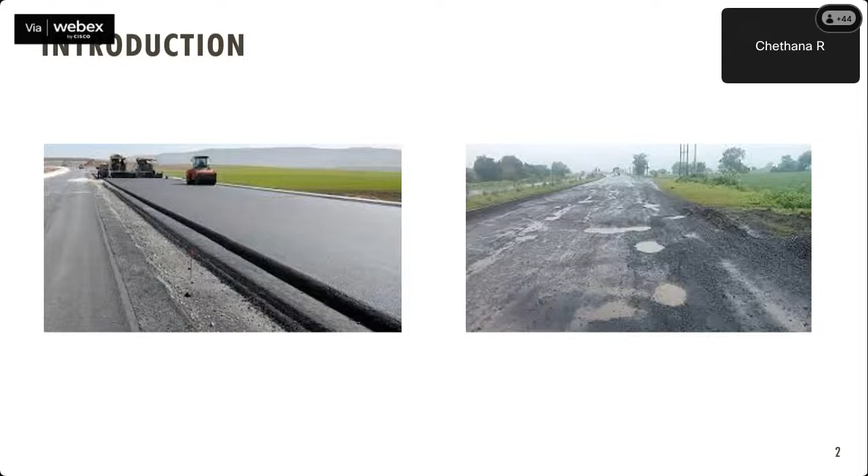And over years, what we can see on the right side is how the pavement undergoes failure, different kinds of distresses that it undergoes, maybe after a period of 10 years, 15 years, or even less based on what the climatic condition and the traffic is. So coming to that, I am showing two scenarios. In India, we have heterogeneous traffic conditions. Most of the highways are loaded mostly by trucks: 2-axle, 3-axle, multi-axle trucks. Some of the highways might not be loaded. So that is a criterion that we need to consider as well.

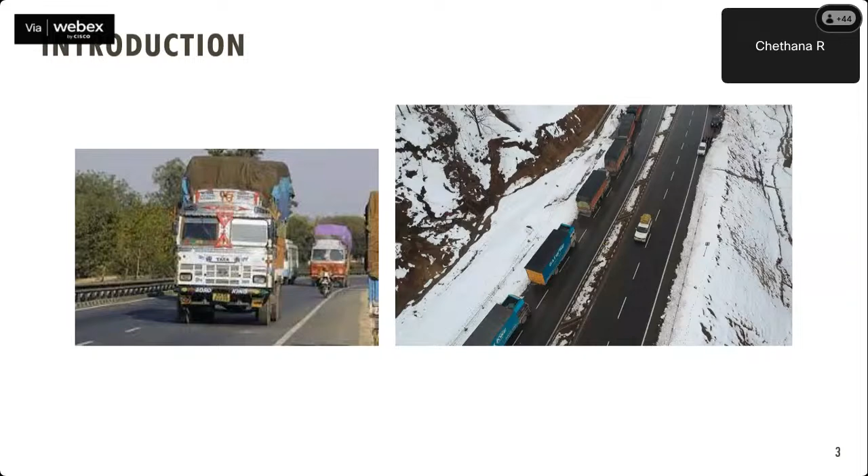Right. So when we say serviceability, since the pavement is an infrastructure, it is expected to behave in a certain manner or be serviceable to the users who are using the pavement. Right. So right from the excellent condition to the failed condition, where I showed in the second slide, we saw a failed condition could be the last part of the pavement or the end of the pavement where it undergoes a rehabilitation.

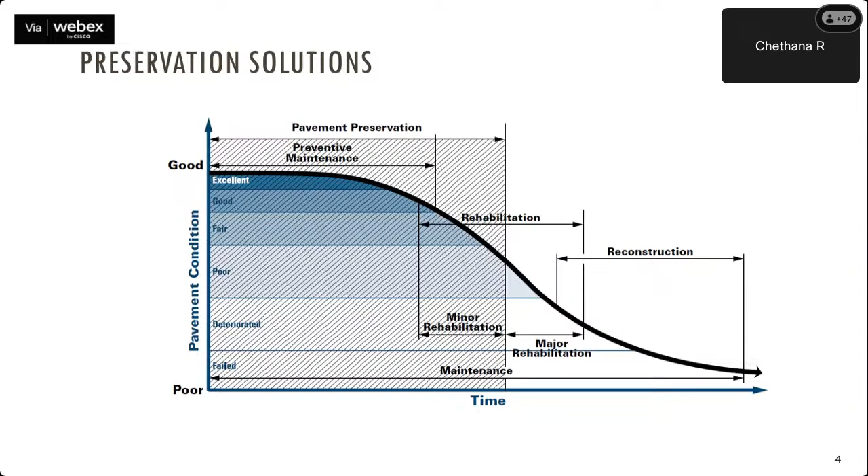So the focus for the highway agencies these days is mainly to maintain the existing pavements rather than constructing the new ones, right? So we have a long length of highways across the country, the national highways, the state highways, etc. So the focus is on how to maintain them as well, apart from constructing or connecting different parts of the country. So we have different types of projects.

Currently, the scenario in India is where the maintenance is schedule based. So now what do I mean by schedule based? So if you take the urban scenario or even the national highways, there is an overlay provided to the pavement. Overlay, when I say bituminous concrete or any other type like stone mastic asphalt, etc. So for the second year, fourth, sixth, eighth, etc., whether the pavement has deteriorated or not deteriorated, the maintenance strategies are carried out. So is that feasible economically?

I would like to differ there, because we say that once the pavement has deteriorated or we know that it's on the verge of deterioration, then it would be wiser to carry out a maintenance strategy. So that is what we call the performance based versus the schedule based. So currently what we follow in the country is schedule based.

So next, coming to the life cycle cost analysis, all that we consider during the initial construction of the pavement is only the design cost or the material cost, etc. So none of the agencies bother about the cost that incurs because of the maintenance that has to be carried out over a period of years, or if we consider a flexible pavement, 15 years. Neither does it talk about the benefits that are going to accrue to the agency, nor the benefits to the road user. So all these need to be considered when a new pavement has to be started for construction.

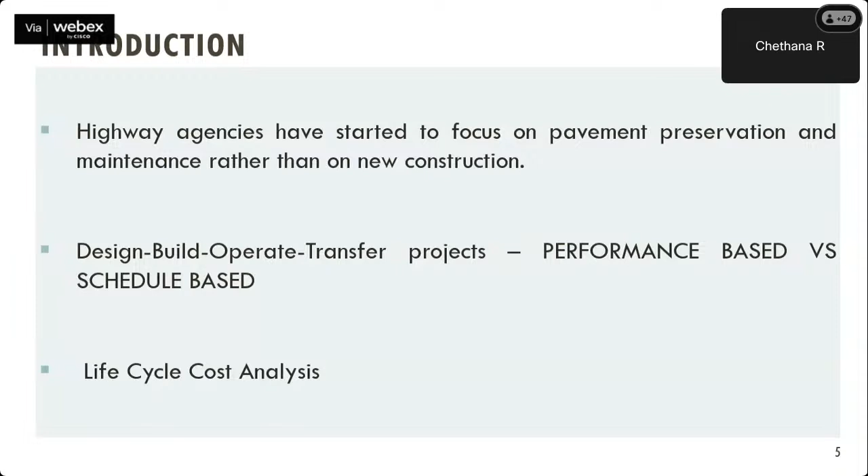So with that, in the slides to come, I'll be emphasizing more on a term called system. So what do we have as this system? We are talking about the pavement management system, which is a set of tools or methods that aids the decision maker. When I say the decision maker here, we are talking about the agencies which take up the construction, in finding ideal maintenance strategies for providing and maintaining pavements at or above the desired serviceability. So as per AASHTO, there is a certain criteria of serviceability supposed to be maintained or met when a pavement is constructed, over a span of time which in our terms we call the design life, right?

So with that, we came up with the PhD research topic, where we thought about the different criteria that are going to be affecting the pavement. So we will develop a framework where each of the agencies who take up flexible pavement construction projects should go through a certain procedure or methodology which they should follow during the course of time, from construction up till rehabilitation, and how they can improve the performance of the pavement accordingly. So we'll be talking about structural performance and functional performance. We'll deal with it a little in detail in the slides to come.

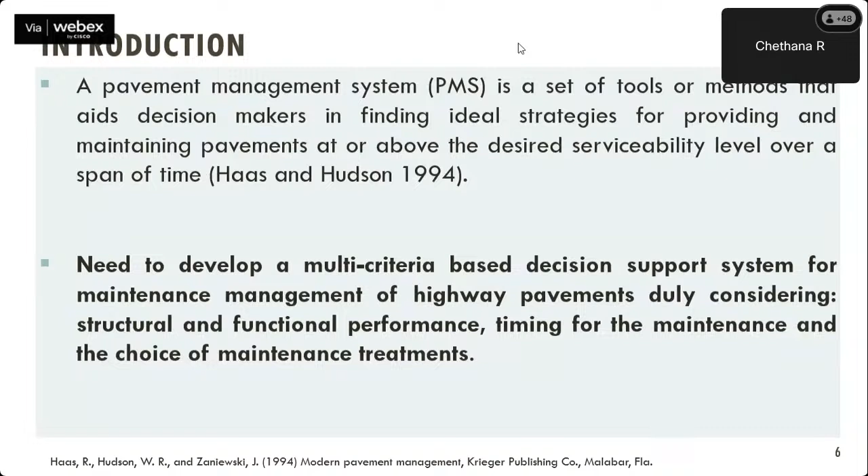So the research question here is where we are developing a multi-criteria based decision support system for the maintenance of the bituminous highway pavements. So that's what we are talking about. So we have certain research objectives which were fulfilled as a part of this work.

So first is we'll talk about the performance prediction models. So we said we have to know what is the performance. Performance, how do we measure them? Maybe in terms of the rutting that's going to occur, in terms of the cracking that's going to occur, in terms of deflection measured either through Benkelman beam deflection meter, which is kind of getting outdated. So we use the falling weight deflectometer. So we measure the distress parameters and try to project it or predict it for the entire design life. So that's the first part of it.

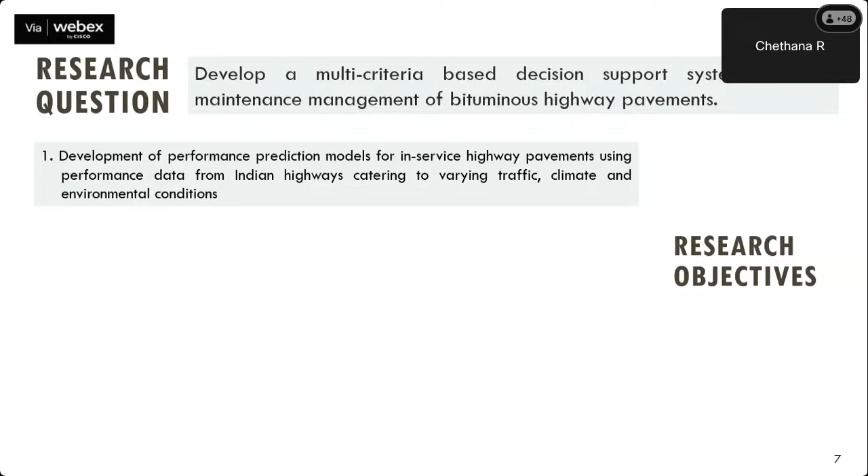Next, we develop a framework to decide the timing. So I mentioned that we have different kinds of maintenance strategies. So what is the right time where we are going to maintain with different traffic levels? Of course, we talked about traffic levels because it's not uniform throughout the country. So we are talking about different traffic levels as well.

And next is to consider at what point should I maintain. So I talked about the performance based versus the schedule based. So we'll talk about two terms called the trigger level and the threshold levels, where we are talking about what is it that is going to trigger the maintenance. How do I decide when I'll perform the maintenance?

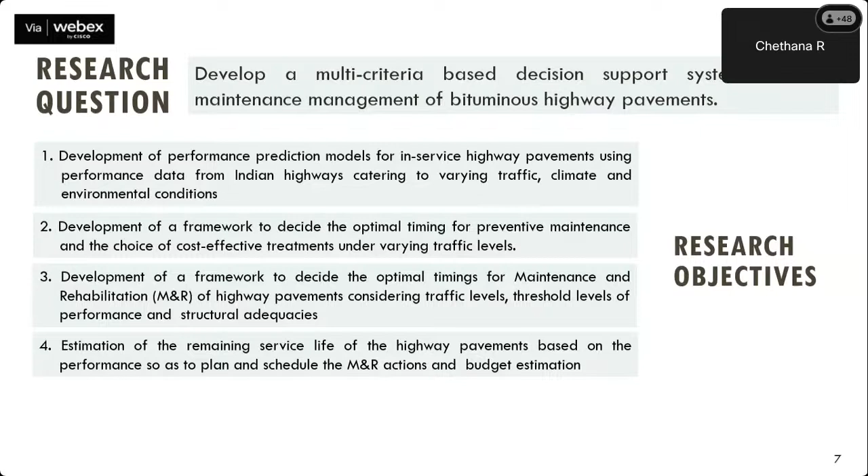Next is, once I do a maintenance strategy, how can I quantify the effect on the service life? Is the design life going to extend? The design life is for 15 years. Can I extend it when I do this kind of a maintenance strategy? We'll also be talking about the economic aspect as well. So last is I'm going to give a framework considering all of the above parameters. So this is the methodology. The flowchart depicts the methodology.

So when we talk about pavement management, we have two levels. So one is the network level where I'm considering the whole state. Maybe like I consider the whole state of Kerala. I can decide what is it going to be into Trivandrum, Cochin to Alappuzha, etc. So I can consider all the roads.

On the contrary, where I am talking about the project level, I'm only talking about one stretch of road. So one stretch of road connecting point A and point B. So I'm going to deal in depth about the different kinds of maintenance strategies or the materials design, etc. only for that particular road. So what we are working here is only at the project level.

So next, we go to the performance prediction models, which I just spoke about, where we determine the different kinds of distresses. So from the performance prediction models, I have different sub topics here, where we are talking about the structural and functional aspect. As we understand, when I say structural, it is the entire layer or different layers of the pavement which is actually considered. Functional refers to only the top layer of the pavement, which is involved in maybe the safe movement or the comfortable movement of the road user.

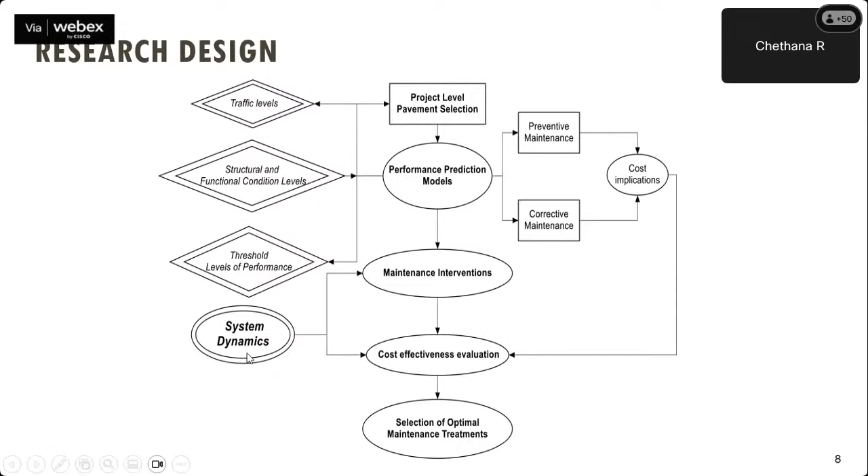So how am I going to model the whole thing into a single system? So I said system is something which we'll be using very frequently. So pavement is not a single material, or it is not a single component. There are multiple components which are involved in the proper functioning of the pavement. So that's where we have modeled all of the parameters which we felt were influencing the performance of the pavement using system dynamics. So we will talk about the first objective. So first one is where we decided to have some performance prediction models.

So there are 4 kinds of models that we looked at. Some of them were actually taken from the data that we actually used for modeling, which was one of the measured deflection areas in the state of Karnataka. So we have taken the actual data and we have done the modeling part.

So first we are talking about the deflection prediction model, where we estimate the deflection in millimeter based on the initial level of deflection. So initial level of deflection is when the pavement is constructed, it would be at a particular deflection. So based on that, how is the deflection going to be over a period of time? So that's the deflection prediction model.

Next, we have the rutting prediction model. Rutting, as we know, is the depression, or let's say some deformation in the wheel path of the highway. So we are determining what the rutting is going to be. The cracking in terms of percentage. So from the area of cracking we'll be able to determine the percentage of cracking. And the last is the roughness prediction model, which is measured in terms of IRI in meter per kilometer.

So in the current scenario for our Indian condition, we have rutting and cracking. These are the 2 main parameters which we will be using as part of our IRC 37 2018, where we consider some amount of rutting, like let's say 20 mm, and 20% of cracking as the threshold up till which the pavement can be serviceable. Right? But we do not consider other parameters like roughness, deflection, or even patching, potholes, we do not consider all of that.

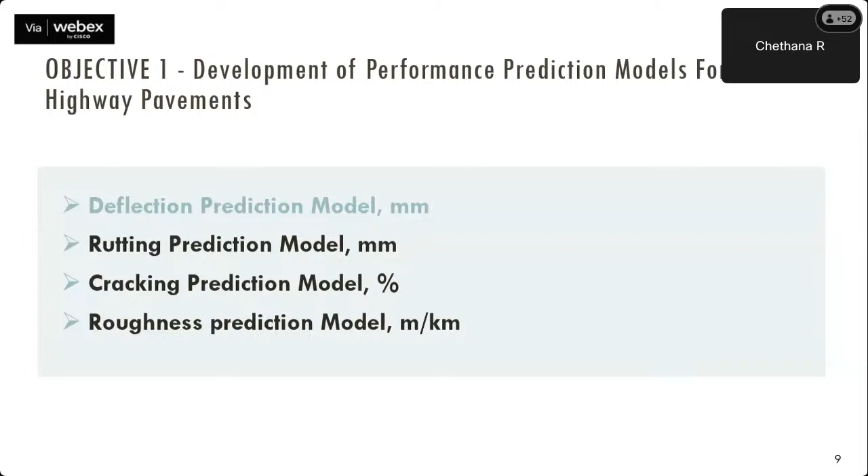What we realized is that the rutting, cracking, and roughness is a function of deflection. When I say function, it is directly dependent on the deflection of the pavement. So with that, we realized that the parameter deflection is the main parameter which needs to be considered irrespective of what kind of distress we are looking at. Since rutting, cracking, roughness, or even patching, raveling, whatever distress we would want to measure is dependent on deflection, it becomes the main criteria for our work.

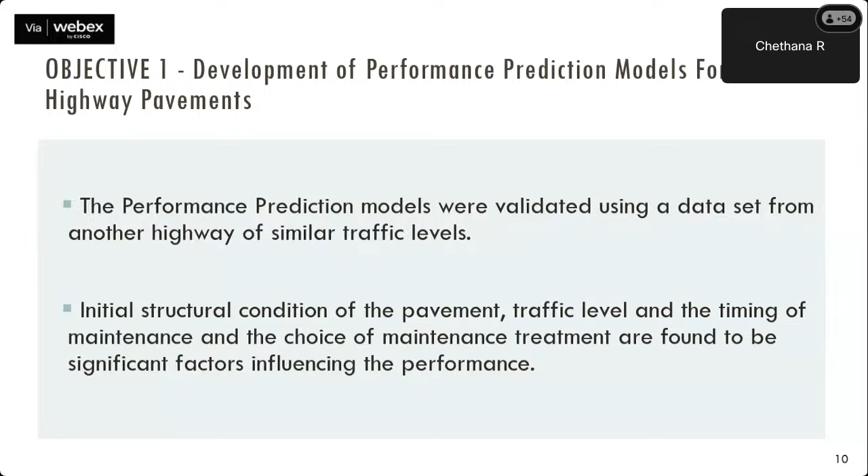So once we determine the performance prediction models, this model could either be a linear or non-linear model based on the different data that we have collected and the parameters that we consider. This was validated using another highway's data, which looks like a similar highway. And then the initial structural condition of the pavement, traffic level, and the timing of maintenance were found to be the significant factors influencing the performance. Most of the performance prediction was dependent on these 3 variables. Hence, they play a major role in deciding what treatment strategies we are going to adopt later in the work.

So 4 levels of traffic have been chosen, considering that 75 is a low volume of traffic and 150 is a high volume of traffic. We have also considered a design period of 15 years for our pavement to predict the performance. The procedure for prediction after we develop the distress models is very similar to what we have in the IRC code.

After that, we are talking about structural adequacy with the initial deflection levels. I mentioned that the structural adequacy, or the initial deflection level of the pavement, was a major influencing parameter for performance. Hence, we have kept that as the criteria to decide the framework. So 0.25 mm, 0.35 and 0.45 mm are the values for which we predict the future performance of the pavement. How have I come up with these values 0.25, 0.35, 0.45? This is not something which we randomly chose.

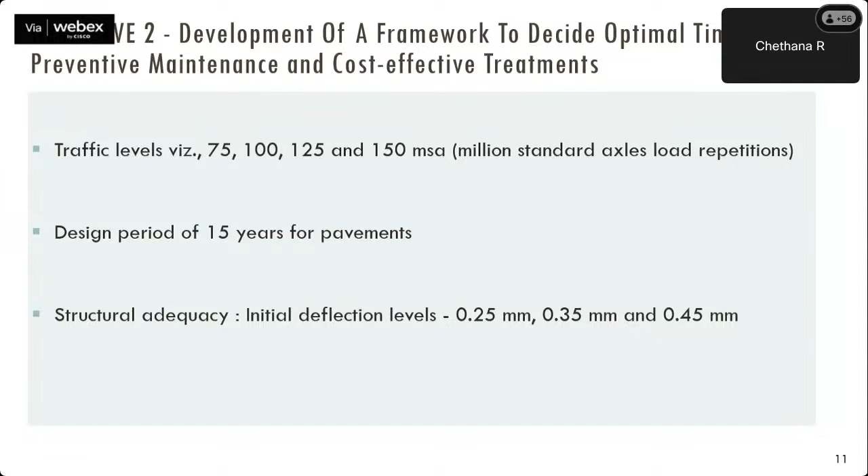A questionnaire was circulated to most of the professionals in the country, the practitioners in the field of pavement engineering. We had a set of questions where we asked them what level of deflection is acceptable. So these values we got from the answers to the questionnaires, where we have decided these parameters. So next we'll be talking about the choice.

So we said we now have different traffic levels, then we have different initial deflection levels. Next is where we have the choice of the treatments. We mentioned that the choice of the treatments could be varied. With the research going on in materials, there is a provision to adopt a wide variety of materials. Even if I just take a simple bituminous mix, for example bituminous concrete, I have different nominal maximum aggregate sizes which I could be using for the surface layer. Again, the bitumen that I'm using could be very different.

So now I'm choosing the routine maintenance. What do I mean by routine maintenance? Routine maintenance is something which is carried out on a general basis, irrespective of the performance of the pavement. That could be as simple as removing loose particles from the road, patching the potholes, or sealing the cracks. Minor repairs like that come under routine maintenance. They do not form a major chunk of the whole cost of the pavement.

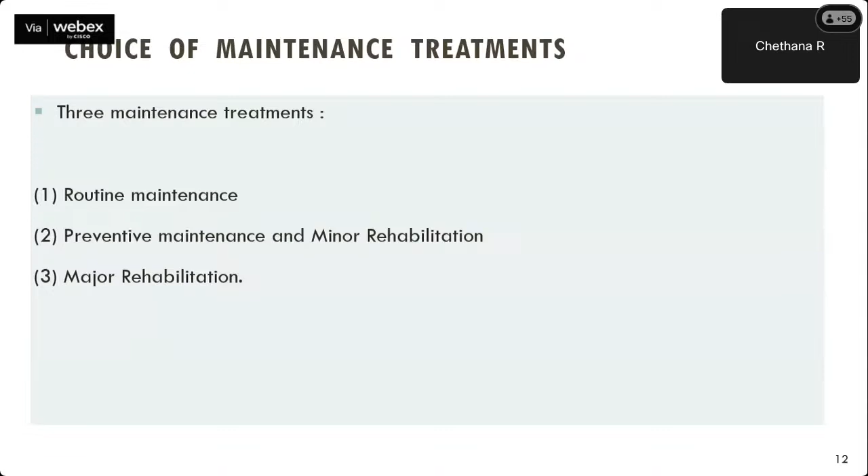Next is the preventive maintenance or the minor rehabilitation. Preventive maintenance is even before the pavement fails, when it is structurally sound, that is, the deflection is very less. So even before it starts to deteriorate, I'm going to provide a certain kind of preventive maintenance. As for minor rehabilitation, I'm talking about bituminous courses of maybe 30, 40 or 50 mm thickness. Major rehabilitation is where we talk about thicker strategies, like bituminous concrete and dense bituminous macadam, or bituminous concrete up to 75 mm thickness, maybe in 2 layers, etc.

First we'll see the preventive maintenance, where we have varied options. We could have a fog seal, slurry seal, micro surfacing, surface dressing. In surface dressing, we have the single coat or the 2-coat; based on material availability or the kind of functional deterioration, we can choose the preventive maintenance. What we need to remember is preventive maintenance is only applicable when the pavement is structurally sound. We can't go for preventive maintenance when the pavement has started to deteriorate.

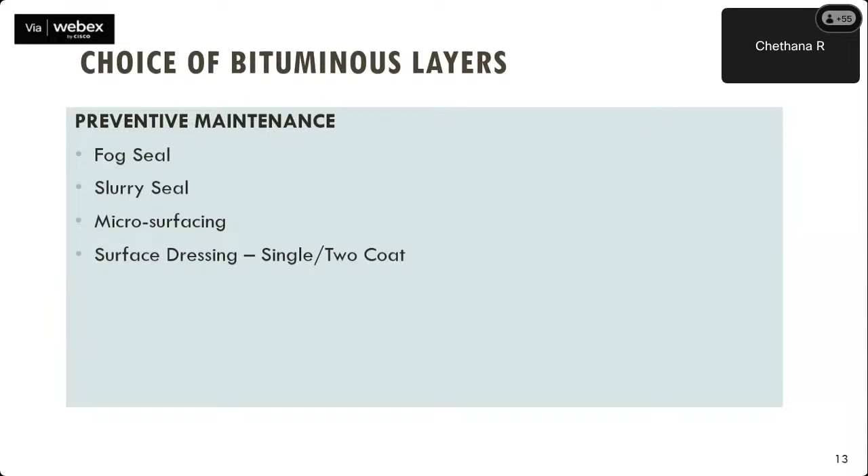I was also mentioning the choice of bituminous layers. Bituminous macadam is not generally used in recent years, but we have dense bituminous macadam, SDBC, BC. Even when I choose grade 1 or grade 2 BC, or grade 1 or grade 2 DBM, I'm not sure which kind of binder I could be using. If I choose the binder, should I use a modifier? Should I use an elastomer? Should I use a plastomer? Crumb rubber modified bitumen is being explored. And in the recent past, we even have plastic and shredded glass, which could be used in the binder. So we have a wide variety of options.

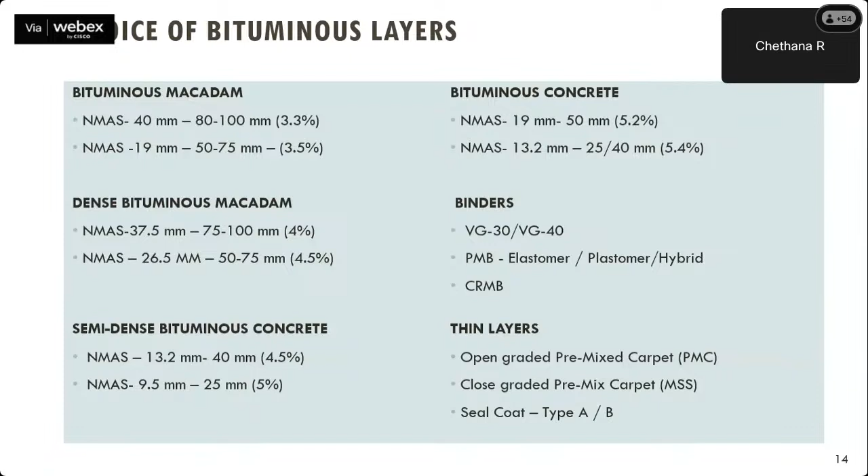And for thin layers, we have the pre-mix carpet, the mix seal surfacing, or the seal coats. So I have a wide range of materials or mixes that I could be using. Apart from that, for major rehabilitation I also have different materials. For the bituminous mixture, am I going to use something recycled, or the warm mixes which are gaining importance very recently? So we have the warm mixes or the recycled RAP. If we do recycling, the decision lies whether we do it in situ, in the field, or do plant recycling and go back to the field. So a wide variety of options are available.

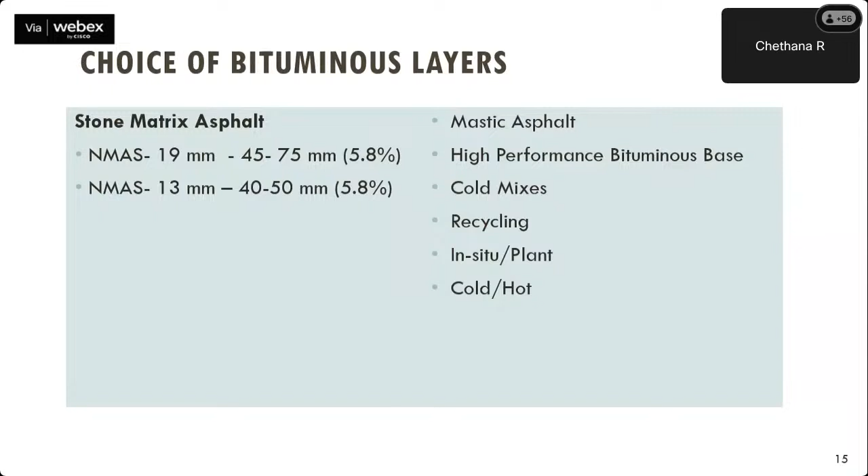So we need to explore, based on availability or the economic aspect, what is going to fit the project that is taken up. All of it is not possible, or maybe one of it might be wrong. So we need to explore what would be the feasible solution. Here we are talking about a new term called the trigger point, where, let's say, this is the performance of the pavement.

So we see a deteriorating pavement here where the condition is deteriorating over the period of age. So if I provide a treatment one, let's say bituminous concrete, then this is how the pavement would perform. On the contrary, let's say if I use stone mastic asphalt, there might be a higher increase. So where it's required for me to provide 2 layers of bituminous concrete, all I need to provide is 1 layer of stone mastic asphalt, which is going to be effective compared to 2 times provision of the bituminous concrete.

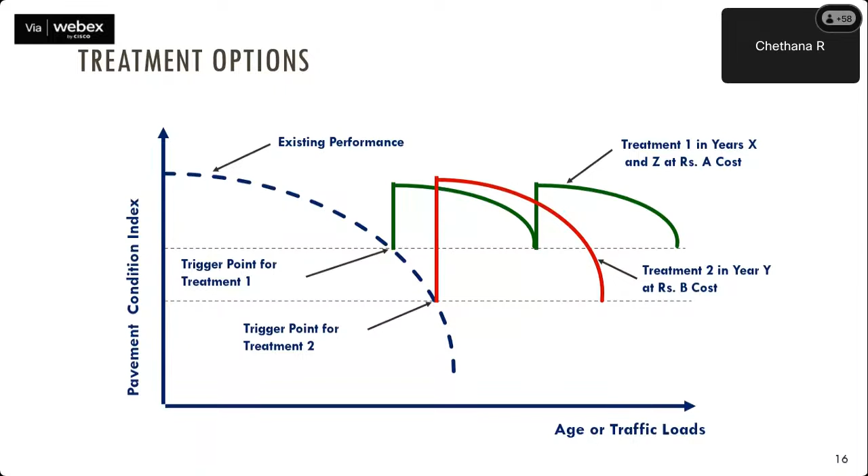So when we say 2 times provision of bituminous concrete, the cost is also going to vary. So here the cost is only once and the performance is also higher when compared to the bituminous concrete. So the choice of the treatment is something that we need to be very sure of.

So next we were talking about the pavement as a system. So we talked about the traffic, initial levels, or the material itself, right? So how do we actually consider this as a system and how do we model it is something which we have done using the system dynamics tool called Powersim. So this tool helps us model the whole behavior of the pavement or the different components or the influencing factors of the pavement modules into a single system.

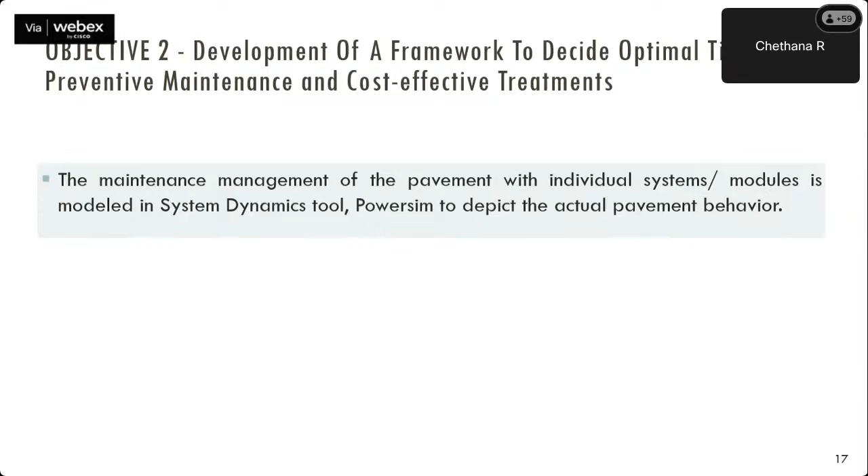And then we also have a traffic module. So all of these modules, the cost, the distress modules, etc., are dependent on the traffic module, because there is no deterioration of the pavement without the traffic. So that is something which we need to rightly project.

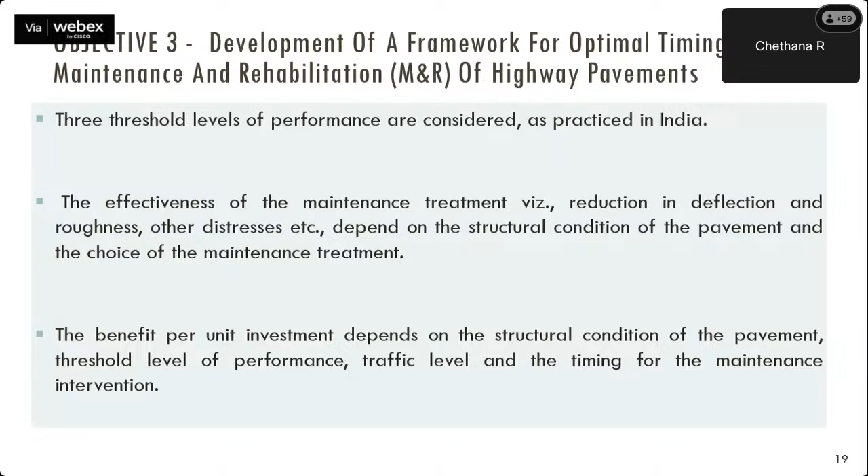Again, I'm not considering every distress separately, because we need to look at many distresses put together and not at a single distress, right? And what is the benefit that's going to occur when we adopt the threshold level differently? So if I do a maintenance at 2.5 meters per kilometer roughness, and if I do a maintenance at 3.5 meters per kilometer, what is the benefit that is going to accrue to the agency? We'll be talking about the benefit area in a while. But before that, we have adopted 3 threshold levels for roughness and deflection, roughness depicting the functional parameter and deflection depicting the structural parameter.

Again, why only deflection? Why not rutting or cracking? Because I already mentioned that rutting and cracking is a function of deflection. So though I project it separately, as different parameters, it is again correlated to deflection. Hence, we have taken deflection as one parameter.

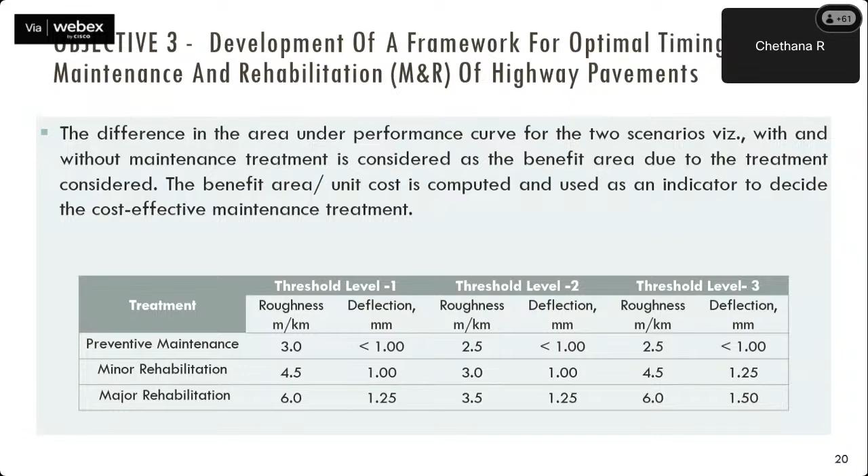For a minor rehabilitation, as soon as the deflection reaches 1 mm, I am going to perform a minor rehabilitation. Minor rehabilitation is when I have a bituminous concrete or DBM, etc., which is less than 50 mm in thickness. Major rehabilitation is when the pavement becomes very rough, around 6 meter per kilometer, or the deflection is 1.25 mm; then I'm going to perform a major rehabilitation. Likewise, I have defined different values of threshold 1, threshold 2, and 3.

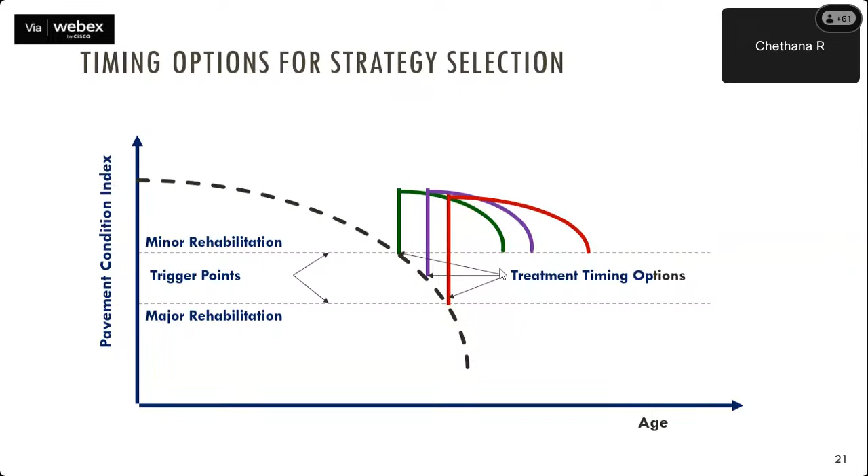So what is the benefit area that we are talking about? We have the minor rehabilitation; the point at which it triggers maintenance is the trigger point, and the level beyond which it should not be increasing is what we have defined as the threshold level. So we have the minor rehabilitation, the threshold level, and the major rehabilitation, a typical performance.

So what do we understand now by the benefit? This is the first deterioration of the pavement. This is the threshold level beyond which it should not be moving down. So I give a maintenance strategy, and then the performance increases. Again, after the material starts to degrade, it's going to deform again, and there is going to be a deterioration in the pavement, right? So the area below this performance curve is what we call the benefit or the benefit area. So this is for one kind of strategy.

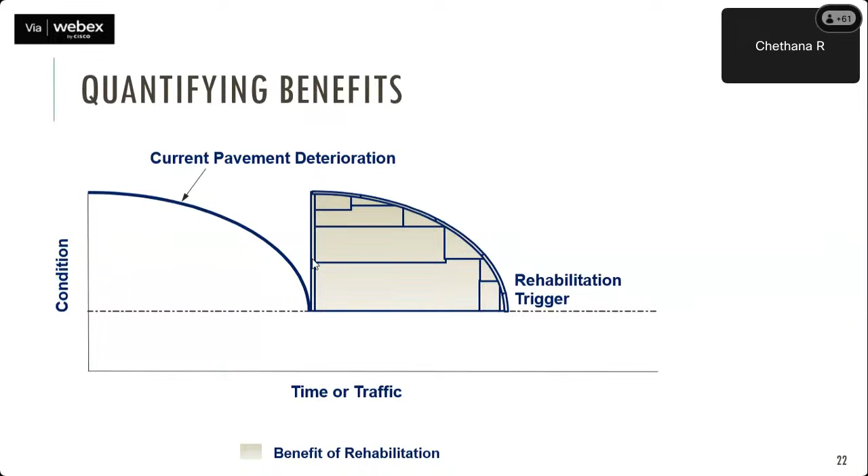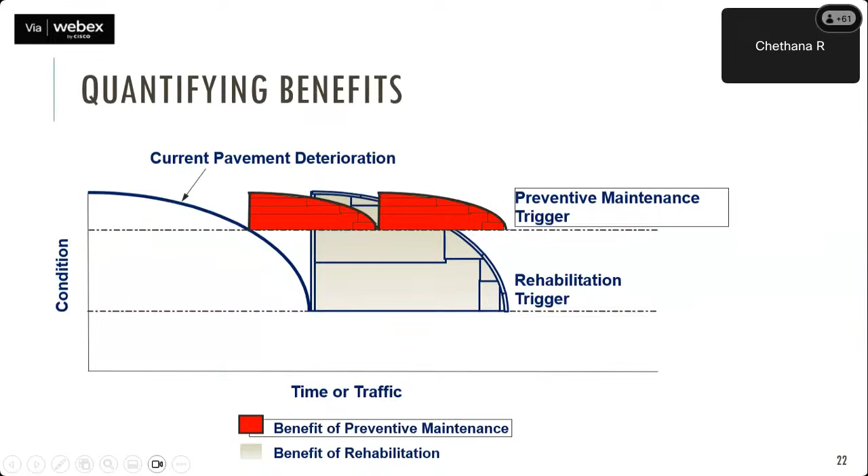Now if I consider a preventive maintenance, I said preventive maintenance is when the pavement is structurally sound. So even before it starts deteriorating, I'm going to provide a treatment. The area under this preventive maintenance or rehabilitation is what we define as the benefit. This is for the entire condition of the pavement. What we have here is given for roughness.

Again, I've just shown typical graphs here where the roughness is continuously increasing for the design life of the pavement. But at a particular year, or when the threshold is reached, if I provide a maintenance strategy, the value of roughness comes down, increases, comes down, and again increases. So the benefit area is the area between the curve with no maintenance strategy carried out and the curve where we have a strategy carried out. The area in between these two performance curves is what we call the benefit area.

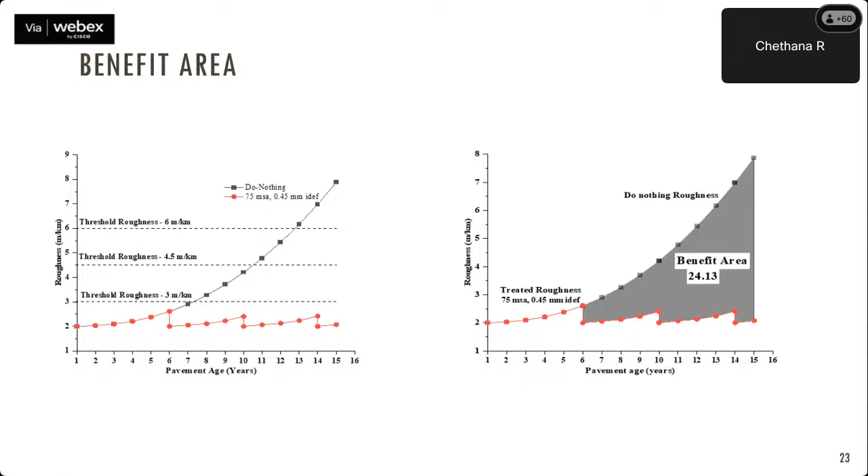And this benefit area is computed for different traffic levels and different levels of initial deflection. Then there was a comparison done between the three levels of thresholds, which we just spoke about, and the benefit area for each was considered. What we understood from the implication of the different threshold levels was that pavements always perform better when the initial deflection is less, right?

So how do we ensure that the initial deflection level is less? Generally the pavements do not have high roughness and deflection at the initial stage, but with the right kind of construction practice or quality control of the materials at the site, it can be ensured that the initial deflection is maintained at a lower level. The threshold level 2 or 3 is where we saw the highest benefits.

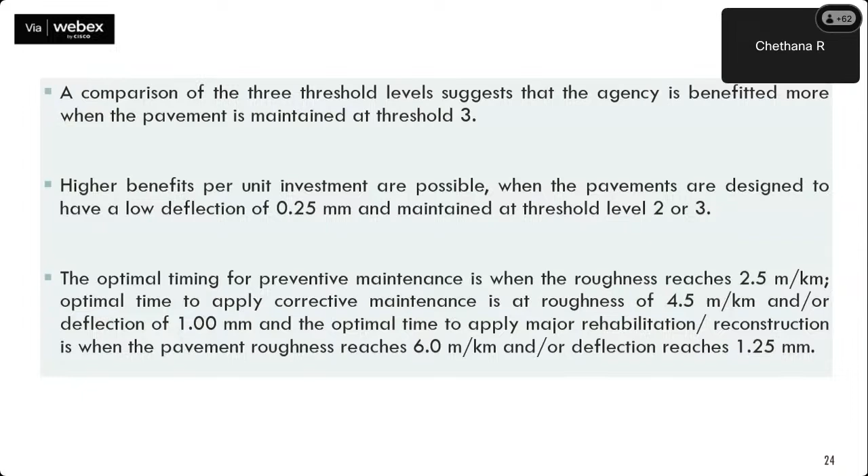And the next important parameter that we observed was the preventive maintenance. The timing for the preventive maintenance is when the roughness reaches 2.5. For corrective maintenance, we had a certain value. So based on what we decided as the threshold level, the benefit we were getting accordingly. So that is something which was observed.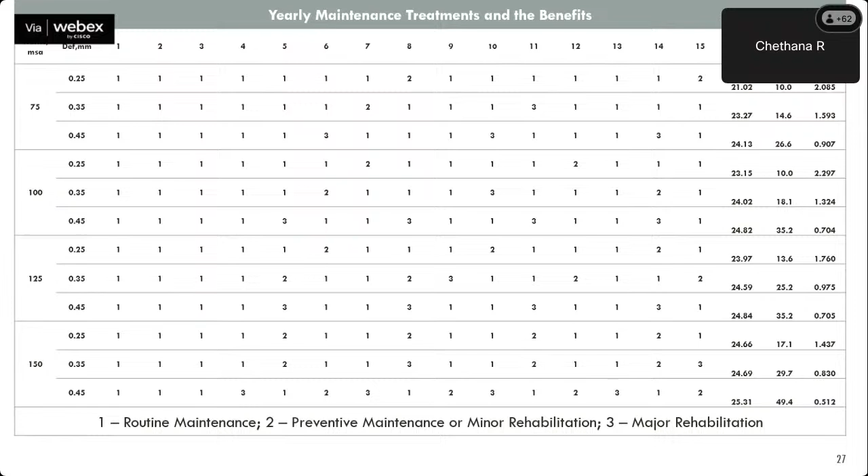On the contrary, for 0.25 mm deflection, instead of just sustaining for 4 years, I can sustain up to the end of the design life. So this is the kind of impact that the initial deflection has on the performance of the pavement, which needs to be very carefully looked at. Based on the benefit area and the cost incurred because of the routine, preventive, and corrective maintenance, the cost was calculated, and hence we determine the benefit cost ratio. And we know that the higher the benefit cost ratio, the more beneficial it is to the agency.

The next objective is whether the life of the pavement is going to be extended if we use a particular treatment. We have considered deflection as the main criteria here. Let's say we have 75 MSA and 0.35 mm as the initial deflection. If I provide a preventive maintenance, the blue one, and then a corrective treatment, the deflection drops down and then it increases.

So instead of failing at the 11th year, the pavement is going to sustain for another 5 years and be serviceable till the end of the design life. So by this, we mean that there is an extension of the service life for another 5 years instead of failing at the 11th year.

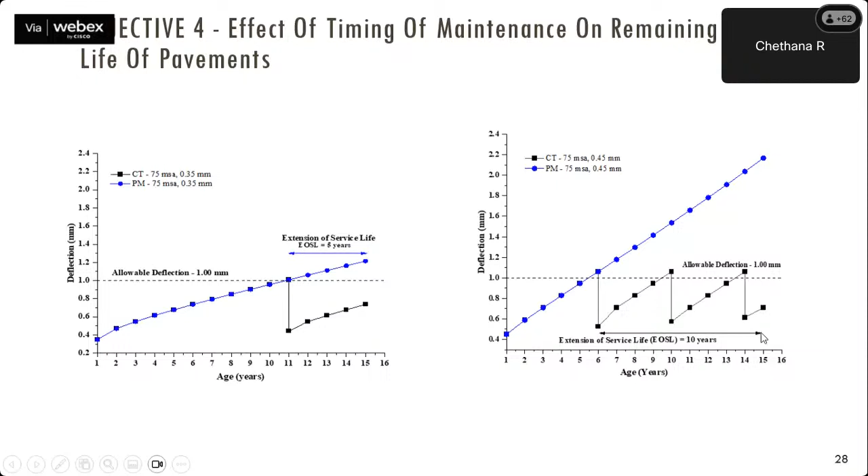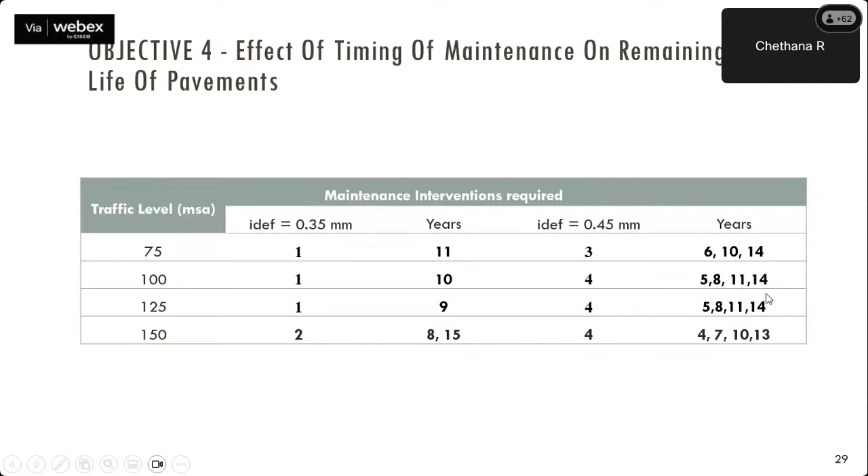Similarly, for 75 MSA and 0.45 mm deflection, instead of failing at the 6th year itself, because the initial deflection is quite high, it's going to be extended up to almost 15 years. We have this for different traffic levels and initial deflections. We see that as the initial deflection increases, the number of treatments increases as well as the cost. So that's something which needs to be taken care of.

Here I have plotted the acceptable service level, or what I also called the threshold level. The red one is the high initial deflection, the green one is the medium deflection level and the blue one is even less. The blue one, as you can observe, rarely comes down to the acceptable level. It is not going beyond the acceptable level, which suggests that the initial deflection needs to be very low if we need a better pavement.

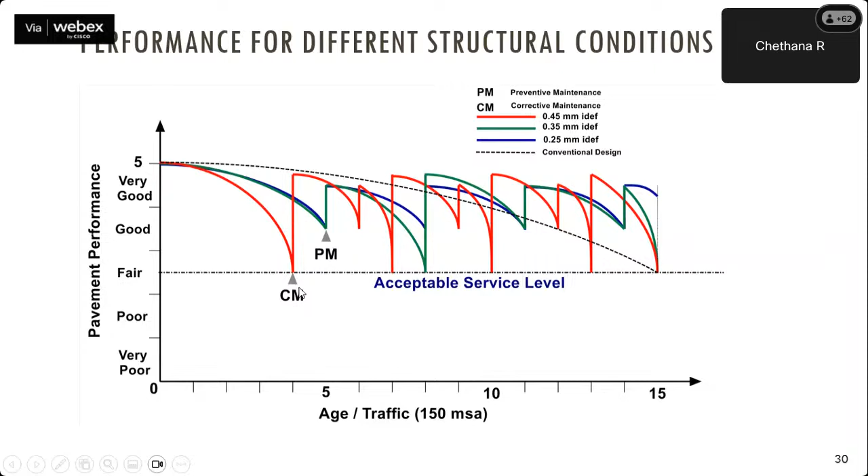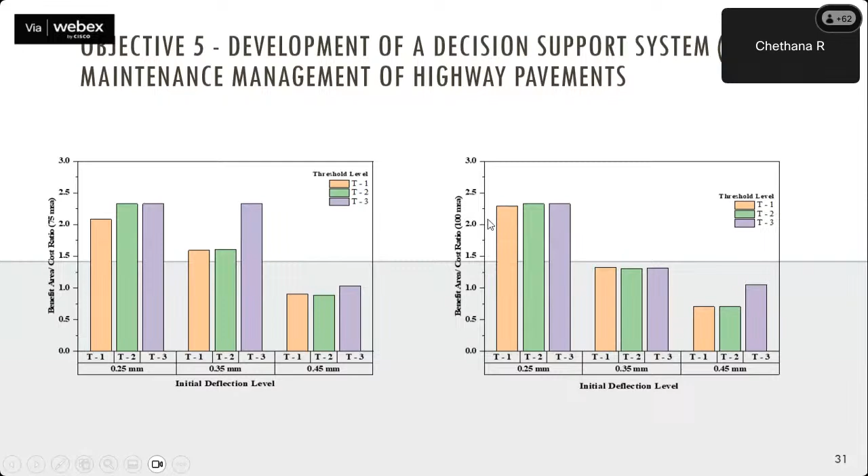So again, PM is the preventive maintenance, and here we are talking about the corrective maintenance. We summarize the whole thing with the different traffic levels: 75 MSA, 100 MSA, 125 and 150. For all of these traffic levels we have considered different threshold levels of 1, 2, and 3, and the initial deflection parameters.

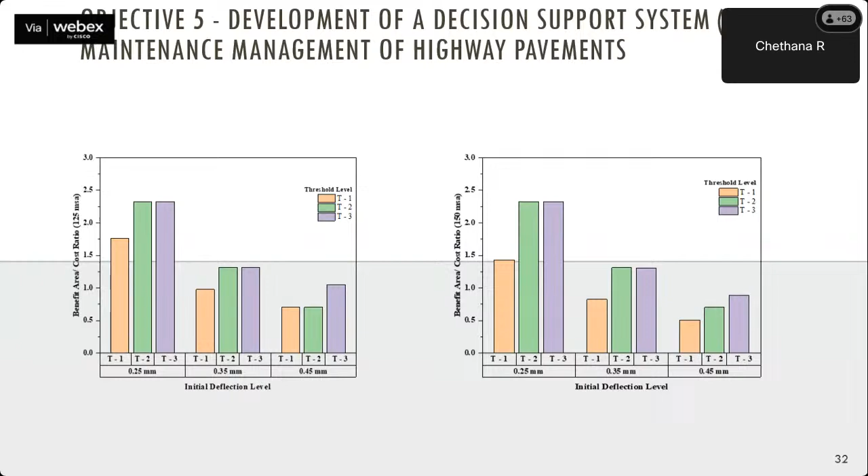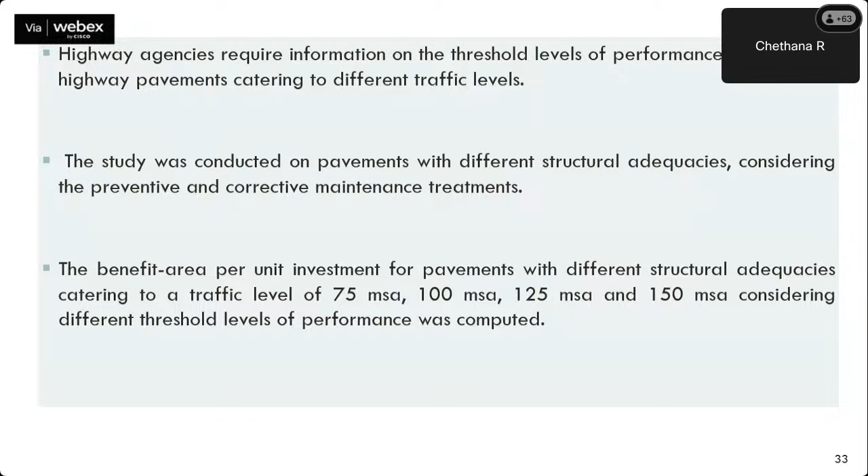And we have tried to determine what's going to be the highest benefit cost ratio, which is going to be beneficial or help the agency economically. So the highway agencies, what we are talking about, are different agencies. So one is they need to be briefed up, or they need to be sure of what is the threshold level that needs to be carried out. So we have talked about different structural adequacies, etc., with different kinds of treatments.

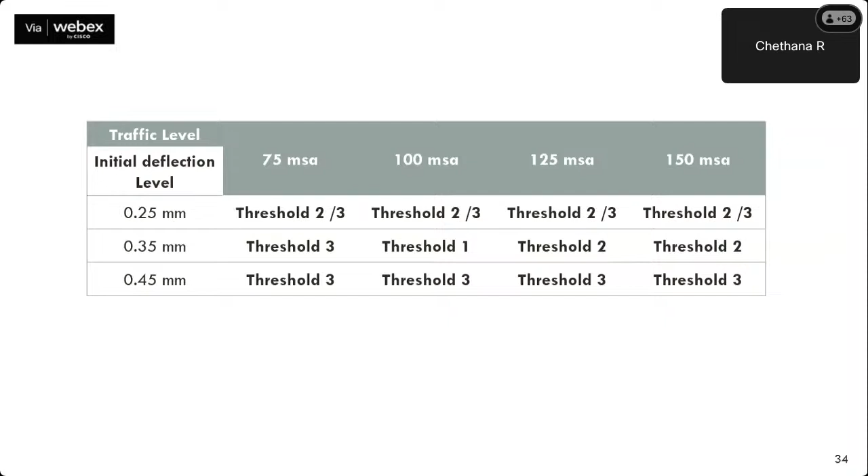So these are the likely suggested threshold levels for different kinds of traffic levels and the initial deflection levels. I think mostly threshold 3 is the one which is used across, or which is feasible, or I would say optimally feasible across the different kinds of traffic levels. So I would just like to summarize in the next 2 slides.

So we have spoken about pavement as a system. Generally what is done is we do the pavement design, but we do not consider the maintenance aspect at all. We do not decide what is the performance, or what is going to be the cost of the performance, etc. So we only do the design, we get the different thicknesses of the pavement, we check for the rutting criteria to be satisfied, we check for the cracking criteria to be satisfied, and then that's it.

So what we need to look at is all the different agencies which deal with pavement engineering, how we should be practicing is that we should deal with it as a system rather than as an individual component. So the pavement is encompassed by a variety of components, as we have understood. So next is the cost. One is the road user cost. At no point of time do we evaluate what is the road user cost.

All that we have been evaluating is the agency cost, that is what is the concessionaire going to be benefiting or how much is the cost that is incurred to the concessionaire, etc. At no point of time is the user considered. So that's something which needs to be looked at.

We have road user cost studies done decades ago, but with different kinds of vehicles, the electric vehicles, or when we are using alternate modes, alternate types of fuel, right? So what would be the cost implication across different kinds of usage of fuel, etc., is something we can look upon. And then the timing is very important. So the year of maintenance or the point where it needs a maintenance or strategy to be used on the pavement is something which we'll be looking at. So we'll just list it down.

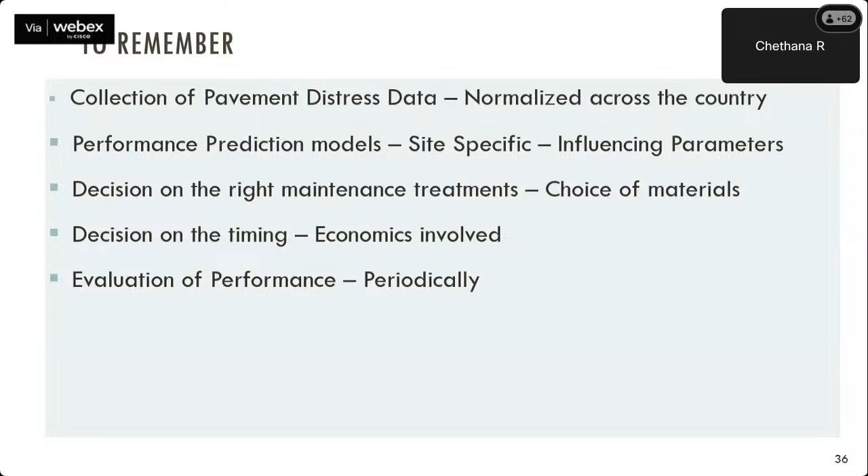So our work does not stop at collecting the data, predicting the performance, or giving a certain maintenance strategy over a period of years. For example, even the deflection data that I had, we had around 3 to 4 years of data of deflection, which we could use. So unless there is some periodical evaluation of the pavements, I don't think a comprehensive model could be developed. So maybe if we consider these parameters in order, there could be a good decision support system for the pavement. With that, I would like to conclude my talk.

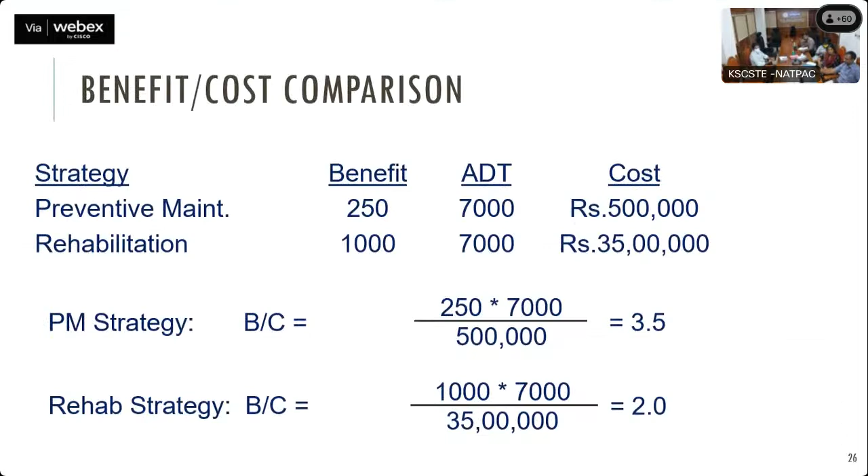Yeah, I have a question. You had mentioned about the deflection values in the initial slides, like you had benchmarked three deflection values. So that deflection value was corresponding to which layer actually? Deflection, we are talking about the top layer. So you had considered only the deflection of the top layers for evaluating this theory, right? Yes, yes. So why were the deflection values of the lower layers not considered?

So one, if we consider rutting, for example, rutting could be a function of, let's say, the insufficient compaction of the bituminous mixture or some failure in the subgrade. Right, so there could be different aspects, different layers when we are talking about rutting. But if we talk about cracking, again, there are two types of cracking, the top-down cracking or the bottom-up cracking, right?

So why I'm saying that this data is a function of the top layer is, the deflection data was collected using the Benkelman beam deflection meter. Now with the falling weight deflectometer, we can back calculate, or we'll be able to determine the deflection of the different layers starting from the top layer up to the base layer. Since the data which we had used was Benkelman beam deflection, it is not a characteristic of the lower layers. Hence the reason that I have taken it.

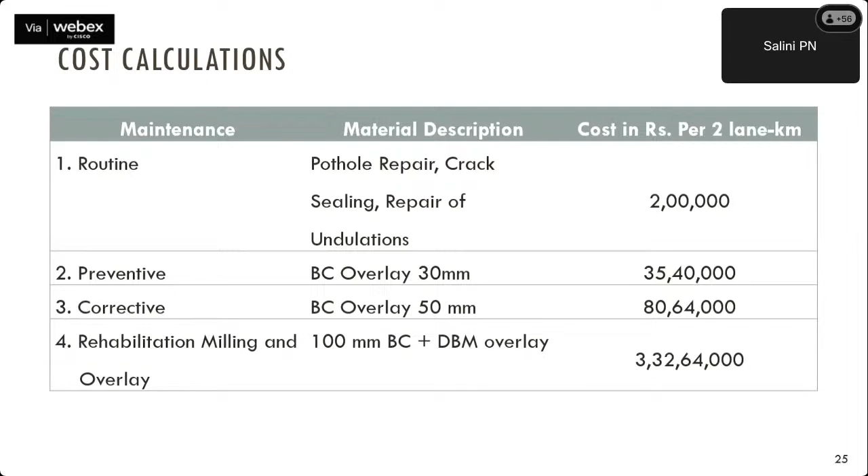I would like to ask you about the incorporation of the drainage characteristics or the climatic and environmental factors in the system dynamic approach, whether it has been included, because as regards Kerala, factors like rains and the climate are going to be a very aggravating factor in the decision of routine or periodic maintenance. So I would like to know how these elements could be incorporated in this approach, or any thoughts upon that. Yes, ma'am, sure.

Yeah, I agree, because Kerala has high rains. So routine maintenance is something which needs to be very carefully looked at, or even preventive maintenance. So what I could do is probably in the distress module. I have not considered the climatic aspect here, or maybe it is indirectly considered where I choose the kind of binder that I adopt. Some of the binders can withstand extremes of temperature. Some, where the viscosity is less, are for a particular kind of climate.

So I can either adopt a different kind of binder, where it is more hydrophobic, right? So that is one aspect where I can incorporate the material parameter. Otherwise, I can also consider a separate module for cracking, where I can predict the cracking or the rutting, any kind of distress, based on the temperature. Again, I need some periodic or historic data which needs to be made available. Else I'll not be able to predict what the performance is.

So maybe now before rains, if we can know what is the kind of performance that Kerala roads have, and then after rains, if we have an evaluation of it, the comparison probably would give an idea of choosing what kind of binder will give me what kind of performance. Again, temperature also can likewise be adopted in the module.

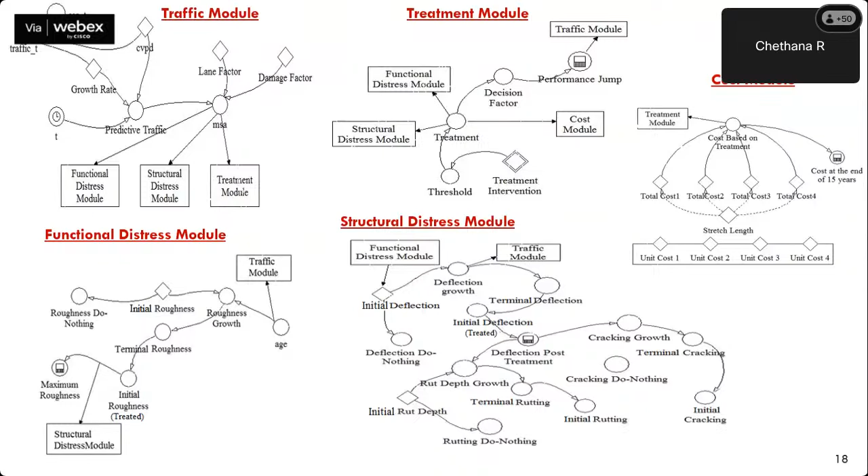This is exactly what I wanted to put across in this forum, because NATPAC has connections, your network is in CRRI, NHAI, and all of those bodies as well. And researchers from throughout the country, you get to meet them. So at least if we have the roughness data, the deflection data, and what kind of maintenance is done at what year of the design life, I think that would be more than enough to start off with. So once we get the hang of when to do the maintenance, or it is established as a code itself, then probably we can start exploring more volume of data as well, I think, sir.